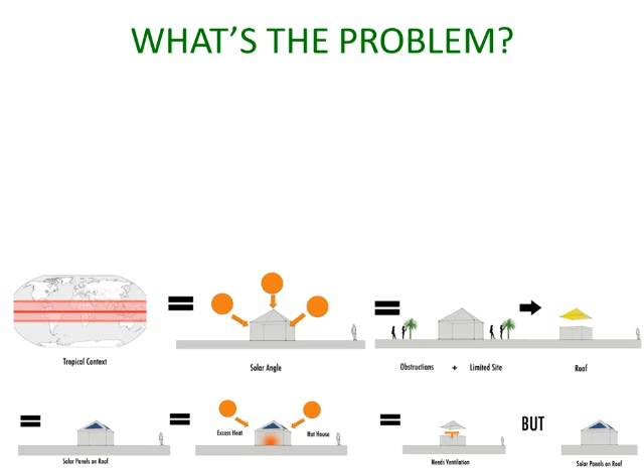Solar collectors need to be placed up high to avoid obstructions, especially in locations where they can be tampered with. And on top of that, putting a solar collector on a building attracts more heat to the building. In the tropics, circumstances are very hot and humid. And because it's so hot, buildings need ventilation. Because there is a lot of rain and humidity, there needs to be protection and possibly collection from water.

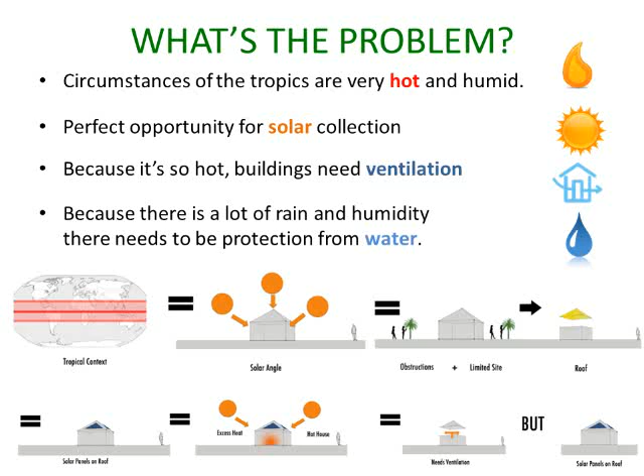So how do we solve this? This thesis claims that if we mimic the form and performance of the sunflower, we can generate solar energy, shade the site, get adequate ventilation for interior thermal comfort, and properly drain and collect water.

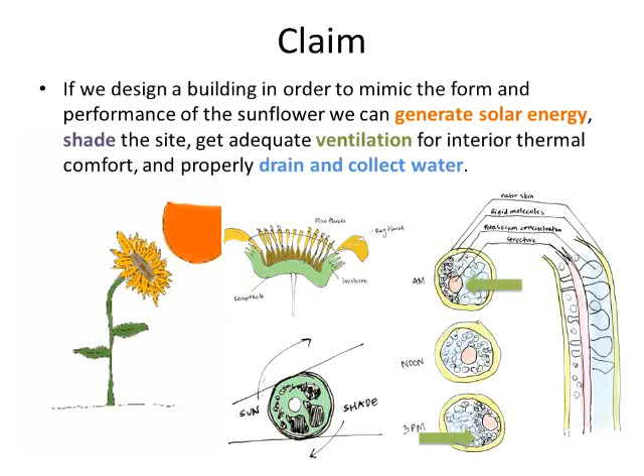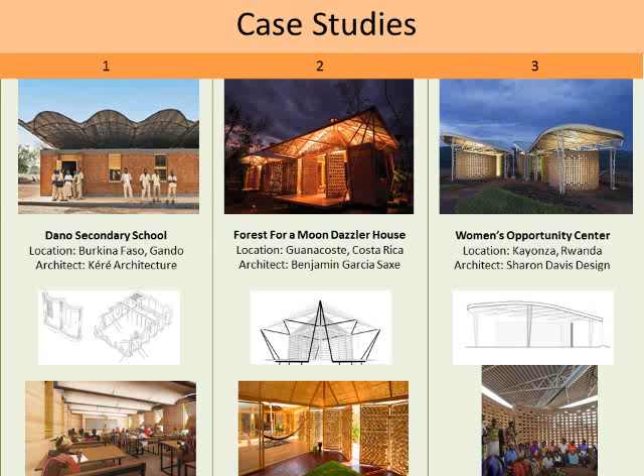I looked at multiple case studies that all address different factors of what I sought to accomplish. These three, which are found in hot regions of the world, all showed that raised roofs allowed for natural ventilation for hot air to rise using the stack effect, and that porous walls allowed for breathable interiors and air to flow through. These two showed examples of movement, both human and mechanical, that allowed for buildings to move in order to adapt with their environment.

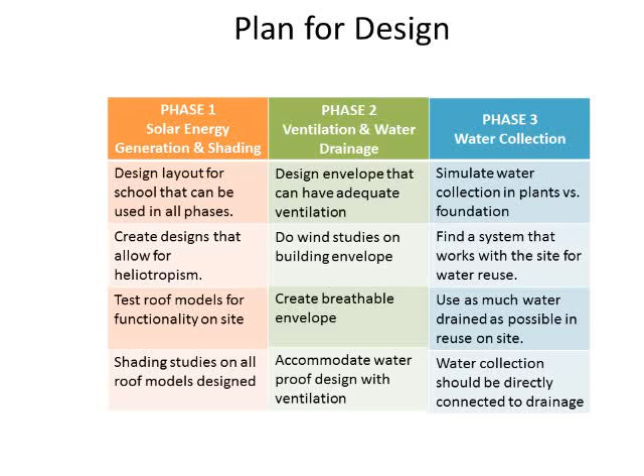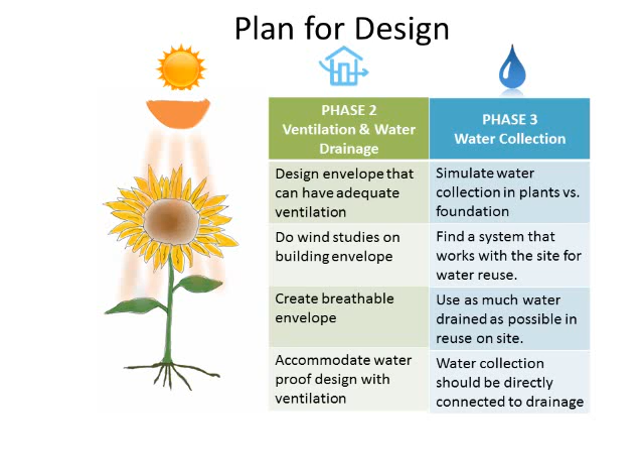From here, I came up with a plan for design broken into 3 phases. Phase 1 deals with solar energy generation and shading, which have function in the leaves and the flower of the sunflower. Phase 2 deals with ventilation and water drainage, which is found specifically in the leaves of the sunflower. Phase 3 deals with water collection, which has to do with drainage from the leaves to the roots.

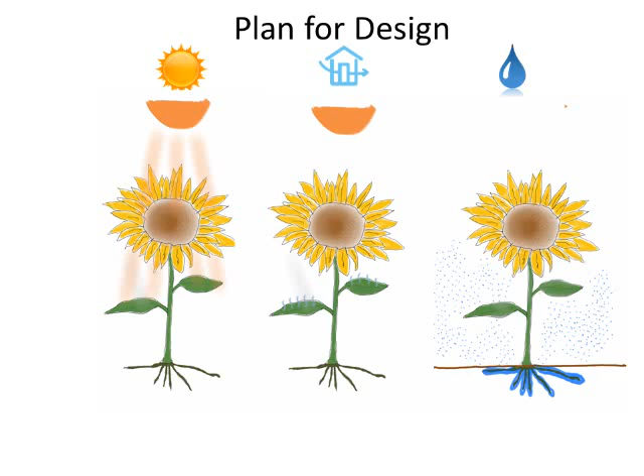The site I selected was Miss Gordon's early childhood institution in Big Bridge, Jamaica, which is southwest of Negril. My family's foundation has been working with this preschool in order to update facilities for the school children over the years. It has a 10-foot by 30-foot footprint. It has wooden walls, a tin roof. It's dark, hot, humid, and is not connected to the grid, leaving it without electricity for the past several years.

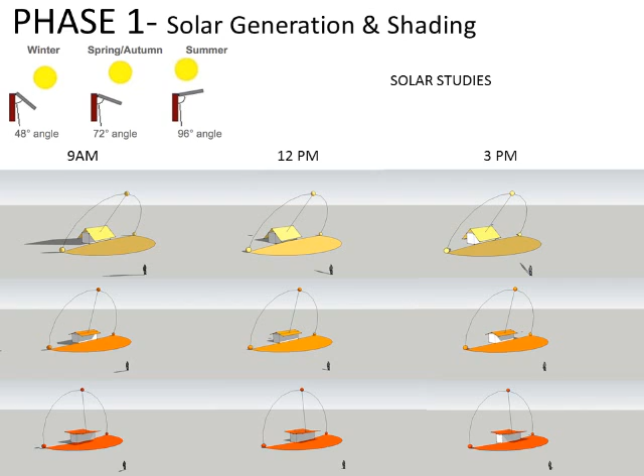In Phase 1, I examined solar shading at different times of the day. The interesting thing about Jamaica is that unlike what is conventional in America, the sun not only hits the earth at a southward angle, but during the summer it also hits the earth at a northern angle. The most efficient photovoltaic system for this region are cadmium and ASI panels, which can be applied as a thin film directly to the roof surface, eliminating a need for an extra engineered structural support found in building applied photovoltaic panels.

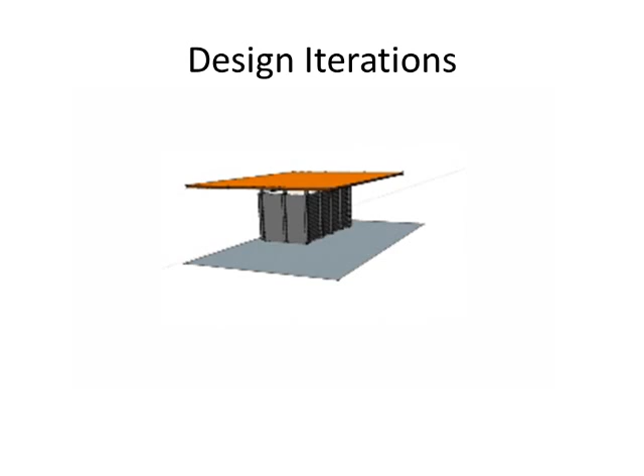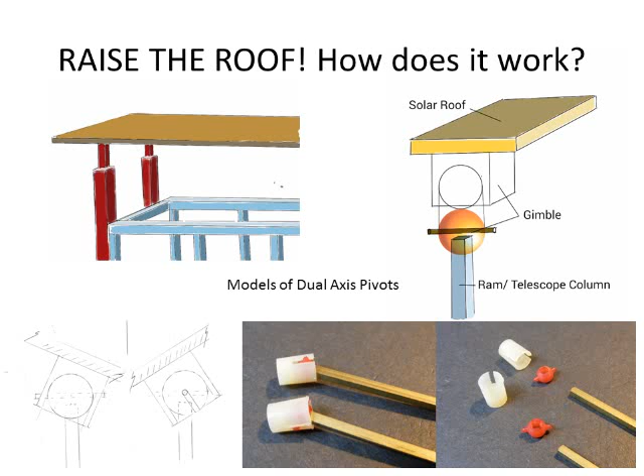There were several roofing iterations that I proposed to mimic the flower, some mobile, some immobile, some with issues of obstruction for both collecting sun and traffic on the site, but in the end I developed a hybrid system that involved a double roofing system. The exterior roof would be supported by 4 telescope columns with low-voltage hydraulic pumps that would feed rams attached to the roof with double axial gimbals for angle changes.

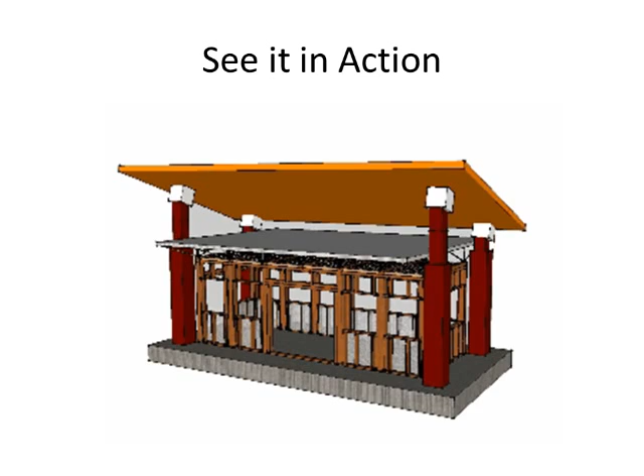This system would need a solar tracker to accurately follow the sun's path and an algorithm to make sure the roof still adapts with the sun on cloudier days. Safety shutoffs would need to be incorporated for high winds and bad weather, as well as overextension of rams. The system is limited to 150 degrees rotation east and west in order to accommodate obstructions in the horizons and overextension of the rams.

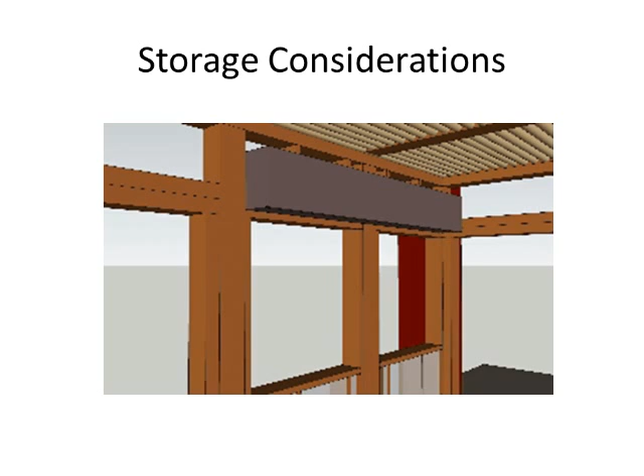Battery storage had to be considered because of their explosive nature. I proposed raised boxes that could be ventilated and incorporate fans, leaving them out of reach of children but accessible for maintenance.

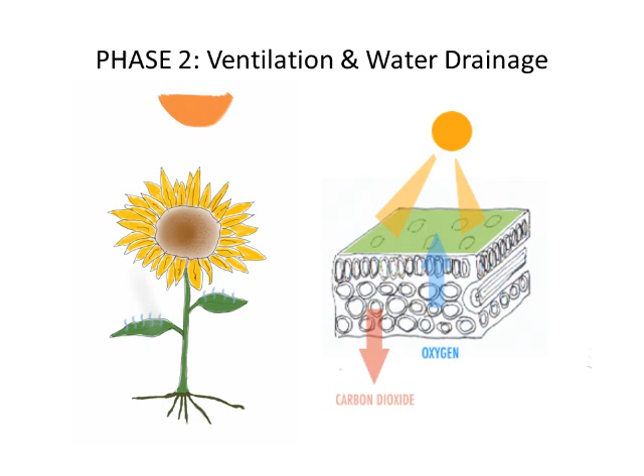In Phase 2, ventilation was addressed. In photosynthesis, which occurs in the chloroplast found in the leaves of the sunflower, there is a constant exchange of airflow that is allowed because of the porous nature of the leaf. I examined multiple types of walls and methods of enclosure in order to ensure that the school building could have airflow like the leaf for thermal comfort but maintain security from intruders and harsh weather.

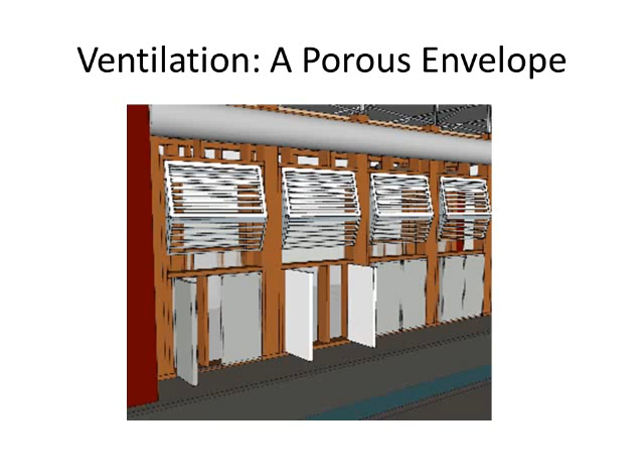In this phase, I also had to ensure that the building was protected from water and ventilation systems designed for the building. Every opening can be closed and secured if need be, and a rolling garage door is mounted at the top to close off the building for off hours and harsh weather. Also, as mentioned before, this is a preschool, and bamboo slats not only provide area for hot air ventilation, but also areas for students to hang their works and projects.

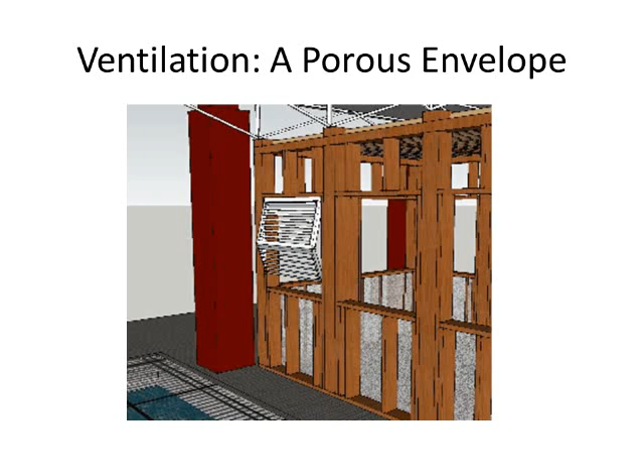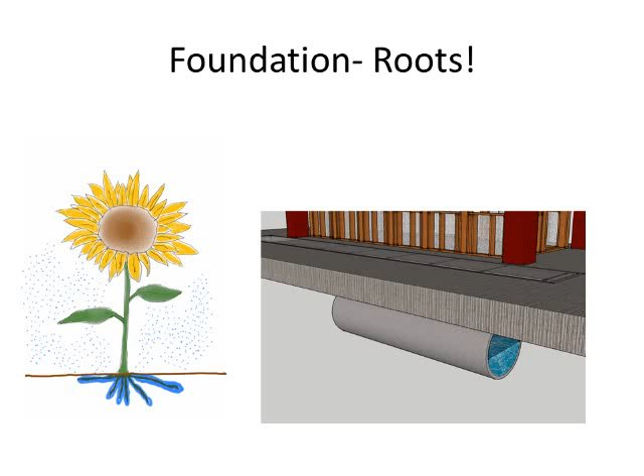In Phase 3, I examined water collection so that the school can store and then later pump to reuse on site for gray water and irrigation. Water will be collected underground in a cistern and then pumped back for reuse. And as you can see here, all of these parts coincide and work together to make an adaptable building able to shift with the sun, shade, ventilate, and collect water.

In conclusion, designing the school building like a sunflower, in return, allows for the building to sustain itself and truly work like a living organism for its occupants and for the environment.